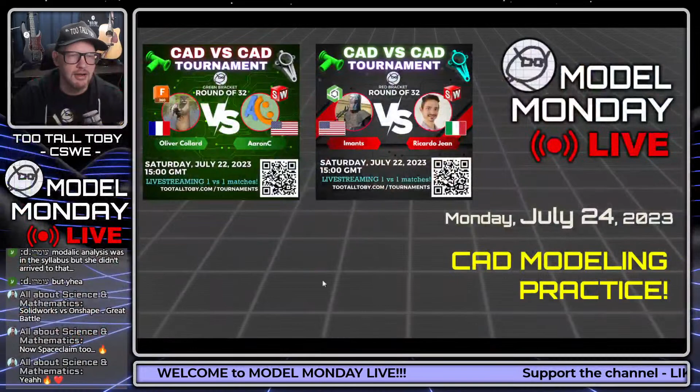Like I said, over the weekend we did some really cool matchups. We had Oliver versus Aaron C., Fusion 360 versus SolidWorks, a really nice matchup. I'm going to show you guys how to model some of the challenges they did this weekend, live, using Onshape. We also had Onshape - Imants from Onshape - going up against Ricardo Jean using SolidWorks, and that was really, really neck and neck. I wish I could have had 5 more matches for them to go against each other, because they were so closely matched, and those are always the most exciting matches.

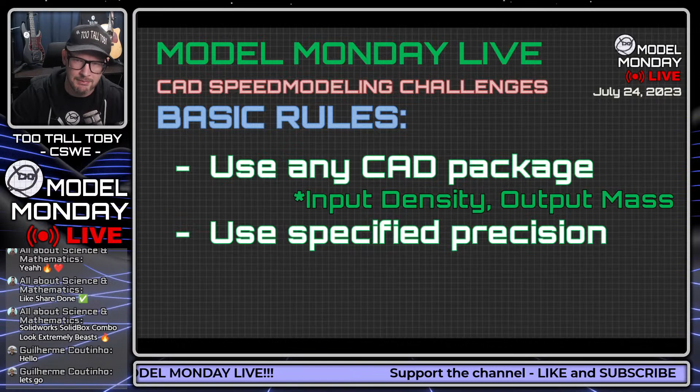So I'm going to show you guys the 2D print. You're going to try to calculate the mass and enter that mass in the YouTube chat. We're going to find out who is the fastest speed modeler in the chat. The basic rules are you can use any CAD package as long as you can input density and output mass, and you want to make sure you use the specified precision on these challenges, otherwise you're probably going to be out of spec. The first person to answer correct in the chat will be declared the winner.

I'll talk about that a little bit more in the live presentation. But the point I'm making here is if you're using a different CAD package, make sure that you've got the correct material density. Otherwise, you're not going to come up with the correct answer.

The advanced rules are that this is meant to be fun and good-spirited. This is something that occasionally I will make mistakes. I do spend a lot of time auditing these drawings. One of the things I'm very proud of as far as the collection of drawings I've accumulated is that they all have everything you need to create a 3D model. A lot of times if you get a drawing from university or just a random drawing from the internet, it's missing dimensions, and you can't actually make the thing on the print without assuming or just guessing what that missing dimension is. So it's nice to know that I have a collection of these drawings.

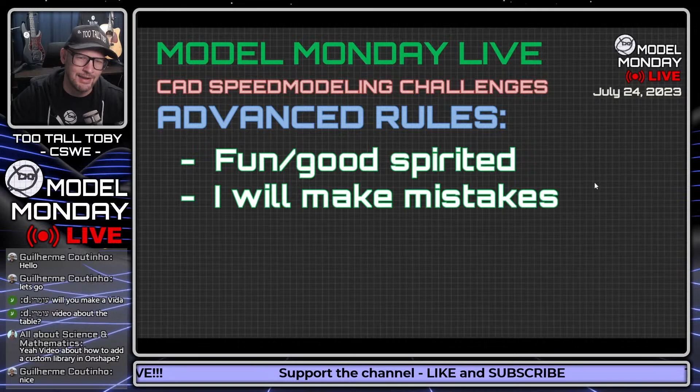Question coming in here: can you make a video on how to add a custom library in Onshape? Not only can I make a video on how to do that, but I already did. It's on the Onshape YouTube channel, there's a playlist on there. I will point to that once we get this first challenge going for the chat. Great question, thank you Omri and All About Science. And don't worry, I got you taken care of, it's already out there for you. You can even search my library in the public space and just pull my library down so you don't even have to recreate it.

Finally, the Ivan exploit is permitted. We saw someone in the tournament this weekend start to use the Ivan exploit and then decide to do a little flex and actually make the model legitimately. That was pretty tight. Shout out to Imants for going the extra mile there, almost costing himself the point, but actually not using the Ivan exploit. That was pretty cool.

All right guys, here we go, let's get into this first challenge. Like I said, the challenges today are a little bit on the complicated side. I think it's going to take you the full 20 minutes.

My goal is going to be to show you the second challenge in about 20 minutes. So let's get into this first challenge here.

Your job is going to be to take a screen capture of this and turn it into a 3D model, calculate the mass, and enter that mass in the YouTube chat. First one to get it correct in the chat is the winner and earns the point for today.

Here we go, 3, 2, 1, go! What is the mass of this part in grams? The tolerance is plus or minus 1 gram, and the material is listed in the title block: 1060 aluminum alloy, density of 2,700 kilograms per cubic meter, and this part is called wedge bracket.

This part has some pretty cool geometry in the drawing for you to examine and figure out. In the lower left corner, that radius 126 and the linear dimension 126 are really just meant to reinforce that the center point of that radius is collinear with the bottom of the base. The radius is the same as that linear length because the center point isn't hanging out in space somewhere.

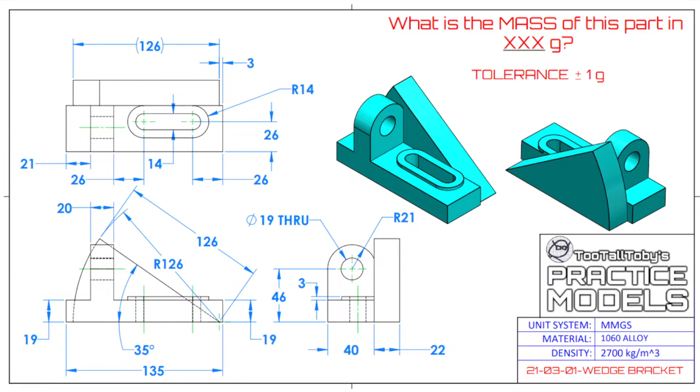All right, good, so hopefully that was enough time for everybody. Again, your job there was to grab a screen capture of that and make sure that you have that on your screen - a lot of times I'll put that on my second monitor.

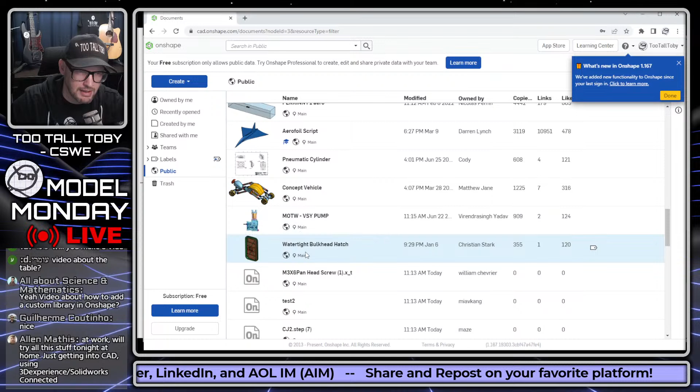So if you're interested, let's see if we can find something a user made, like this concept vehicle by Matthew Jane. You can just click on that, and it opens up in your session of Onshape. Look how quickly that opened. You're able to examine this thing as an assembly, and you're able to move components around.

You're able to see actual dynamic assembly motion based on the mates in that assembly, and you're able to make a copy into your workspace so you can start making your own version of this thing. Now, obviously, you can't change Matthew Jane's documents, because you don't have permission to make changes to his project. That would be a crazy system if everybody could just change everybody else's files. But you can certainly make a copy and make changes to your own, and kind of springboard off of this design.

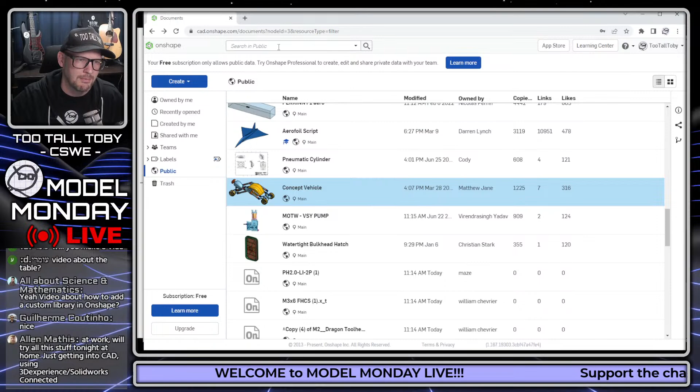Or maybe search for an item that you need for your product - search for a wheel in the public space, or a knob, or a guitar, something like that right in the public space. So pretty good stuff here. Definitely really enjoying my time in Onshape, as I've mentioned in previous episodes of Model Monday Live.

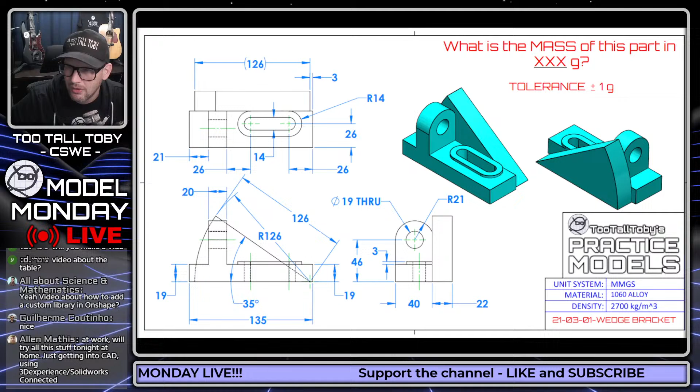Allen's in the chat: 'At work, we'll try all this stuff tonight. Just getting into CAD using 3D Experience SolidWorks Connected.' Okay, another solution that's out there. So good to know that we've got people using all different solutions out there. And you're in this wonderful world of TooTallToby Model Monday Live. All CAD is welcome. Good luck on your journey, Allen.

Erwick, what's up my man? Thanks for joining us. So yeah, the tournament this weekend was, like I said before, totally epic.

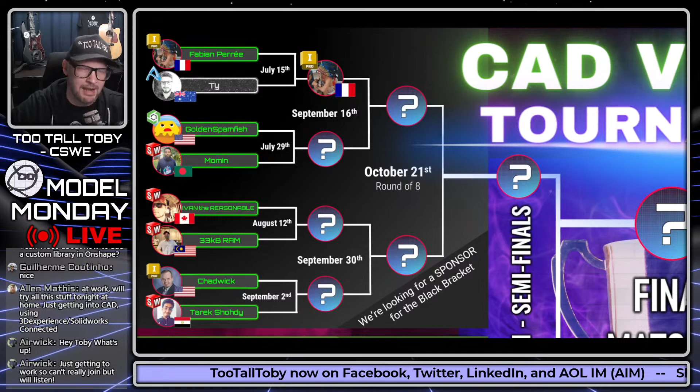Two weeks ago on Saturday we had the July 15th matchup between Fabian and Ty, where Fabian came out victorious. Then this past weekend we saw Imans versus Ricardo Jean. I don't know if this was the closest match we've had so far, because the match in the black bracket with Fabian and Ty was also very, very close - the answers were coming in within just a second of one another.

But it was kind of a surprise in this match with Imans and Ricardo, because Ricardo's screen didn't share properly on Zoom, but he was still modeling. So when we saw Imans go through and create the model, and then saw Ricardo submit his answer a second later, it was just such a cool moment. It was a real surprise.

Then they got to model against each other in the second one, and we all got to watch their modeling technique. I'm going to do one of those models today so you guys can see how I would approach it. What's up, Edgar CHL? Welcome, thanks for joining us.

And Oliver versus Aaron was also an awesome matchup. It was really cool to see Fusion 360 - this is the first time we saw Fusion 360, first time we saw SolidWorks, and first time we saw Onshape in the tournament this year. It's always fun to see the way the different CAD packages operate, watching them stream live and think through the challenge, but also seeing the different features and user interface.

A lot of these CAD packages I've never had the chance to run, or even see. So in the tournament it's kind of cool that we get to see them actually functioning - how would you do this in SolidWorks? How would you do it in Fusion 360? Kind of seeing two masters showing us how to create these different features.

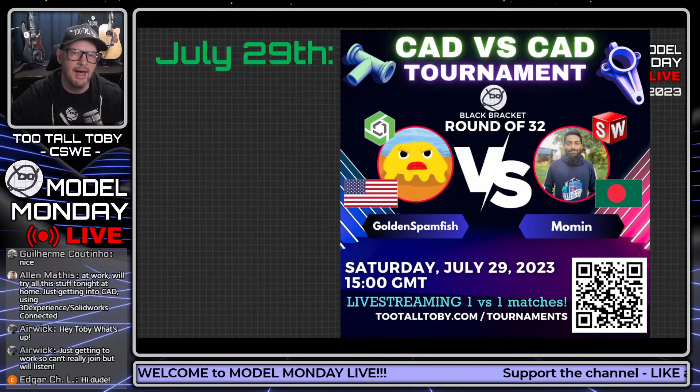So excellent matches this weekend, huge thank you to all of the runners. Be sure to join us July 29th - we're going to see Onshape versus SolidWorks, Golden Spamfish going up against Momin. Check that out on Saturday, July 29th - we're going to see some really good matchups there.

Also on July 29th in the blue bracket, we've got old friend of the show, Muhammad, using CATIA V5. I think this is his third year in the tournament using CATIA. Muhammad always shows up and gives us a great demonstration of what it looks like when a pro uses CATIA. It's another one of those CAD packages a lot of us haven't had the chance to run, so it's really cool to see it in action.

We see here that Muhammad is going to be going up against Res, who is going to be using SolidWorks, also from the United States. That's going to be a great matchup as well.

We got AMD Alex in the chat. What's up, Alex? Already coming in with an answer, very impressive. I'm not going to say if that answer is correct or incorrect, but Alex is going to be in the tournament a little bit later on.

It's great practice here in Model Monday Live. I can't think of a better place to get your practice in, get your nerves out, and see what it's like to actually compete against other people. You're competing against everybody from around the world, but you still have that privacy bubble around you where it's just you on your screen. You're not sharing your screen yet, but this is a great chance for Alex to get some practice in before his big match comes up. For anybody out there who's in the tournament, it's a nice proving ground before it actually comes to tournament season—or should I say tournament time, since we're already in the season.

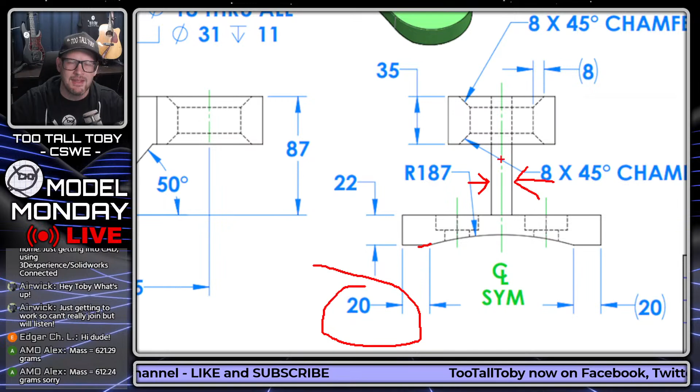He got to the end of the run, finished the model, and submitted his answer. I said, I'm sorry Aaron, you've submitted an incorrect answer, so you have one more chance to submit a correct one. Aaron started going through and found one of his mistakes, but not the other. When he found that first mistake he said to himself, 'that's probably what it was,' and submitted the answer again. But it was like, oh, I'm sorry Aaron, that's once again an incorrect answer.

So we put the clock up and gave his opponent, Oliver, 5 minutes to solve this thing. Oliver wasn't able to solve it in 5 minutes either, so it ended up being a push.

It was one of those situations that I think are really interesting in the tournament. Sometimes if you make one mistake and you go back through and find it, you're good—you can submit that correct answer. But if you make two mistakes, it's really easy to find the first one and think 'oh, that must have been it.' In this case, it turned out he didn't quite find the correct answer.

So, lessons learned from watching people in the tournament—a good lesson for anybody in the tournament in the future. It's a tricky balance trying to get that answer in before your opponent, because you never know. You can sort of see your opponent's screen on a delay, but you never know when they're going to do 2 or 3 quick moves and then they're done, submitting the answer before you. But you've got to balance that against really going through and checking your answers.

All right, so good to see some action here in the chat. We see some more answers coming in. Of course, in Model Monday Live, you can revise your answer as many times as you want.

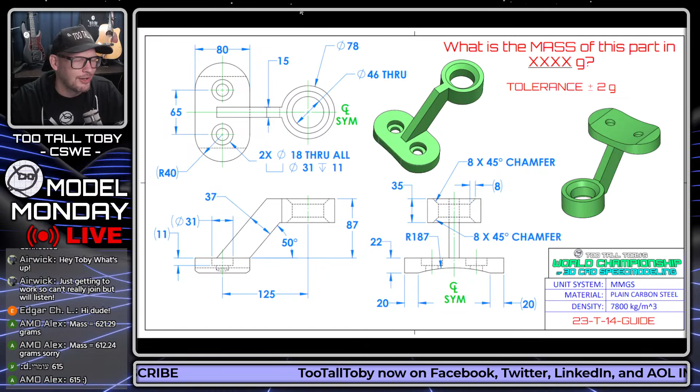We see that Alex and Omri are going at it here, neck and neck, coming up with some different answers. So we'll see what everybody else in the chat comes up with.

But I've got about 9 minutes to finish this model. What I like to talk about during Model Monday Live is what a professional would think if presented with this model, whether it's a 2D print on the shop floor, a napkin sketch someone hands you, or just an idea. Maybe I just have an idea: I need to create a mount for a soldering iron.

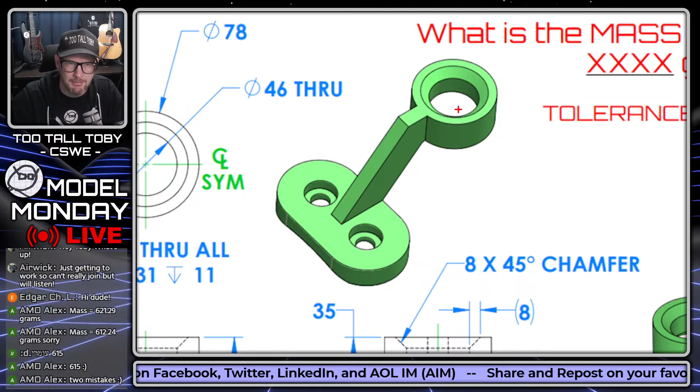This looks like it would be a mount for a soldering iron. The soldering iron is going to go down in here, sitting in this hole. It usually has some kind of a sleeve, and the soldering iron needs to sit in there. So I'm going to create a little mount that I attach to the side of my workbench so I can set my soldering iron down easily while I'm working, without having to completely cool it down. I don't know if that's really what this thing is, I'm just saying maybe that's what it is.

You have that idea, so now you've got to model it up. The first thing I always ask myself is: is the model symmetric? Can you draw a line down the middle and it's the same on both sides? Because if it's symmetric, that helps you figure out where to create the origin, what your starting sketch will look like, and what your very first feature will look like.

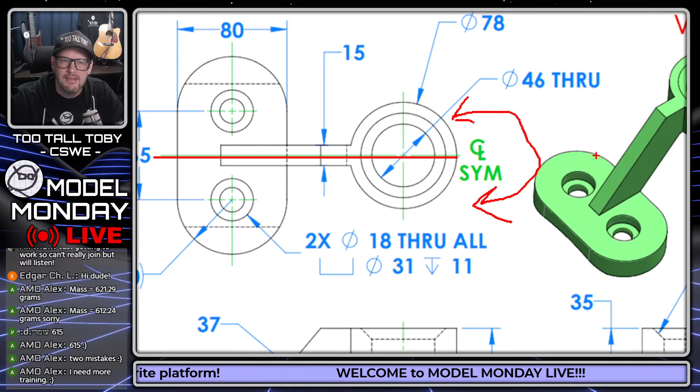In this case, the model is symmetric. Whenever we see the CLSYM symbol in green here, that means the model is symmetric. So now I know the origin is going to be somewhere in the middle.

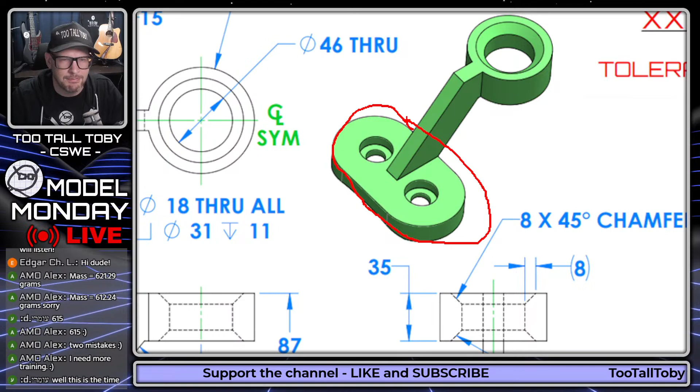Now the next challenge is what's going to be your starting feature in this model. I think it makes sense to have either this section up here or this section down here be your starting feature, because all the dimensions are coming from those two features. It gets a little arbitrary which one you decide on, but most of the time in the engineering world we pick this feature because it represents the base, or the thing that's going to be mounted to the other thing. It kind of represents an anchor point in the real world, and that's usually an intuitive place to start your design in the 3D CAD world.

So that's where I'm going to start. I'm going to take a screen capture of this thing. My game plan will probably be to create this shape here, create the little curved area on the bottom of that shape, create this shape up here, create the bridge that goes between them, and then finish by creating the holes down here in the base, the hole up here in the top, and the chamfer going around here.

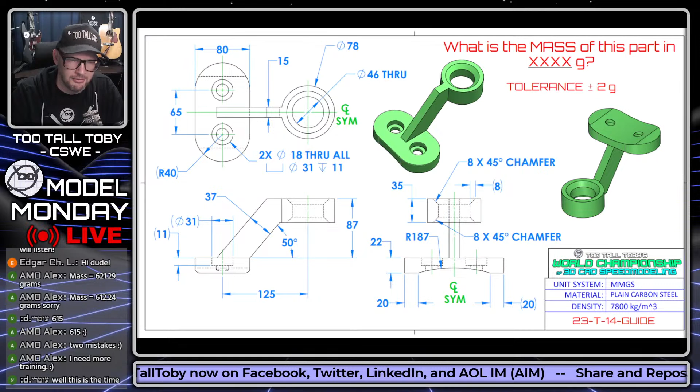How do I know that's the order? The simple answer is I just know from experience, from having built models like this over and over again, and a lot of experience in the world of 3D CAD. So how do you get good at anything? You just got to practice, practice, practice.

So I'm going to create a new document here in Onshape. I'll call this one 23-T-14-guide. This means if you want to see this model in 3D, you could sign up for a totally free account at onshape.com/free, search for this text string in the public documents, open up this model, and take a look at how I created it.

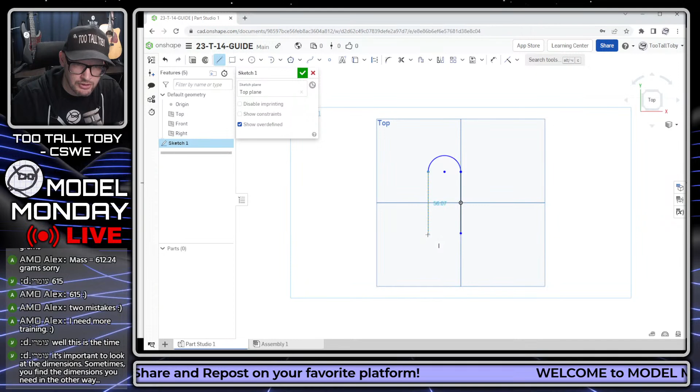I'm going to start by creating a sketch on the top plane. You would probably create the origin either at the center of this shape, or at the midpoint of one of the edges. This gets a little more nuanced and honestly a little less significant—it becomes kind of arbitrary which decision you go with. I think I'll pick the origin itself and this line, and add a midpoint relationship between them. Once I've got that midpoint relationship, I'm pretty much ready to fully define this sketch.

So it looks like this is going to be 65, really from center to center, and then this is going to have a radius of 40, or a spacing of 80. Now I'm ready to turn that into an extrusion.

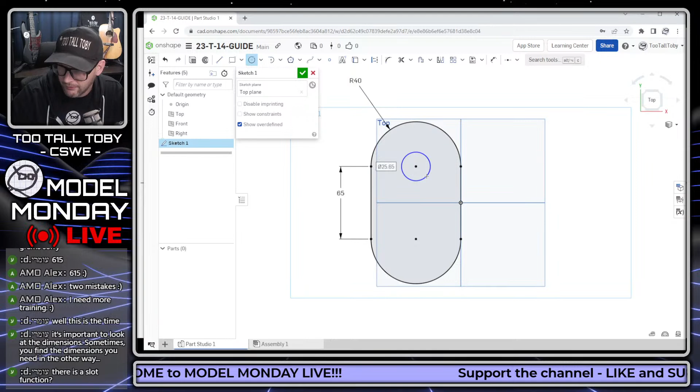What I could do is get in there and start drawing the geometry for those holes as well. Onshape does a great job in this scenario of letting you create all the geometry you need. I could create these holes here, and certainly I could mirror them, but a lot of times if you learn how to use auto dimensioning, it's just as fast as mirroring.

Now, this is really a speed modeling technique more so than a real world approach. In the real world, you'd want to either do that with a hole creation tool, or you'd want to do it with at least a mirror.

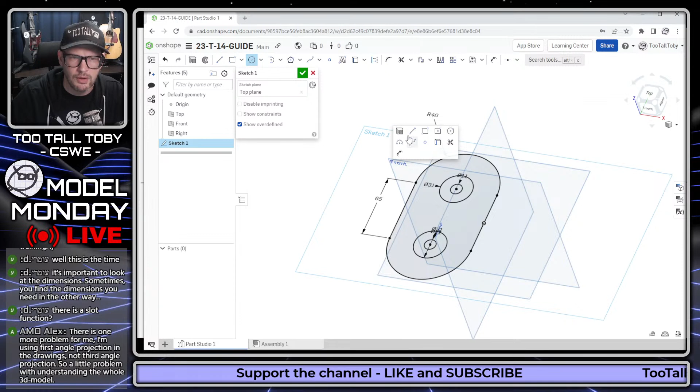But you can see here that, like I said before, Onshape does a great job of grabbing all the geometry that you need for that particular shape.

So this is going to come down to a depth of 22 millimeters, and I'm going to reverse the direction. I do see some chat coming in, but I'm trying to finish this pretty quickly here.

So now that I've got that geometry in place, I'm going to select this face, begin a sketch, get normal to. I'm going to take this bottom edge here and convert it.

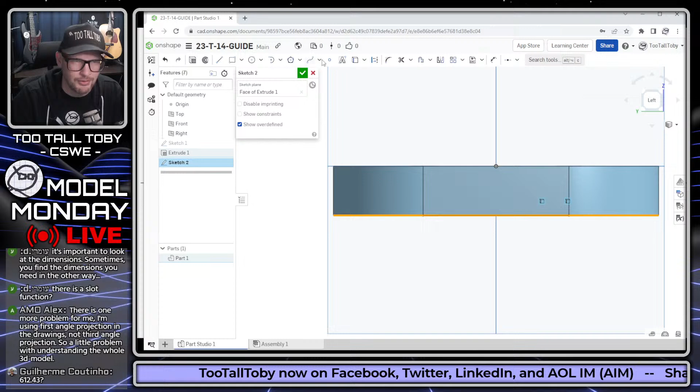I know this drives people like Airwick nuts when I go through and convert stuff, because I could just use imprinting, but sometimes it just makes it a little easier for me to utilize that geometry. You don't really have to, you could just imprint, but it just makes it a little easier. I'm kind of a creature of old habits sometimes.

So make that 187 for the radius. And then this is the spot where Aaron misdimensioned. He made this dimension 22 instead of making it 20. There is a 22 dimension right there on the print, which is probably what led to the confusion. Sometimes my prints do have intentionally tricky features.

So I'm going to say this is going to be a remove and a through all, and that should cut out that bottom section. Yes, very nicely.

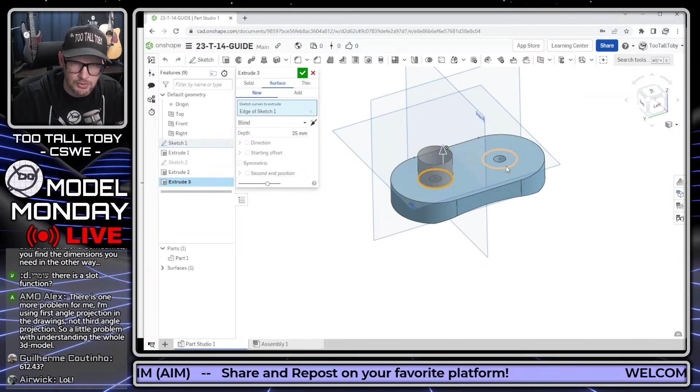I could also, at this point, if I wanted to, go back and show this sketch and then just reuse it to also do a remove using these features. Onshape makes it really easy for you to quickly remove geometry using the same sketch.

Whoops, I didn't mean to get the whole thing there. There we go, and that's going to go down to a depth of 11. All right, so now we've got our counter bores in there. We don't need to see that sketch anymore. There's kind of our base feature on this thing.

Now what I'm going to do is take this top plane and jump into the new plane creation command, and I'm going to say that's going to be offset to a distance of 87.

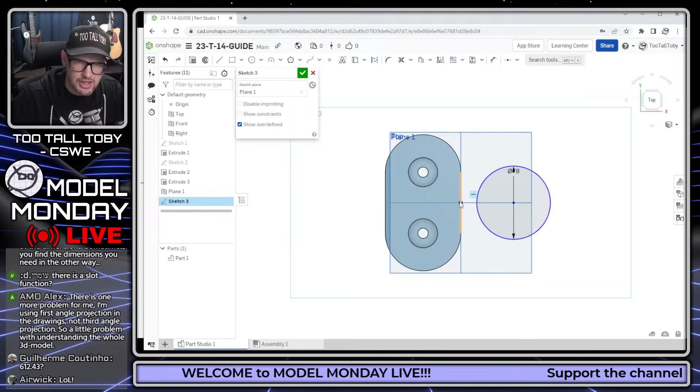And now on this new plane that I just created, I'm going to create the geometry for that upper region. So I'm doing this as two different bodies or two different regions of the model. In Onshape, we would consider that two different parts, but in other CAD packages, you might consider it two different bodies. The thing that's cool about Onshape is that there's really not that much difference between multi-body design and multi-part design in a single model. It all kind of sets itself up to be added to an assembly later on.

So now that I've got that geometry in place, I'm going to go front plane, begin a sketch, orient my view, and I'm going to, once again, make the Onshape community angry by using a convert entities command that I probably don't need to use. So I will convert these edges here.

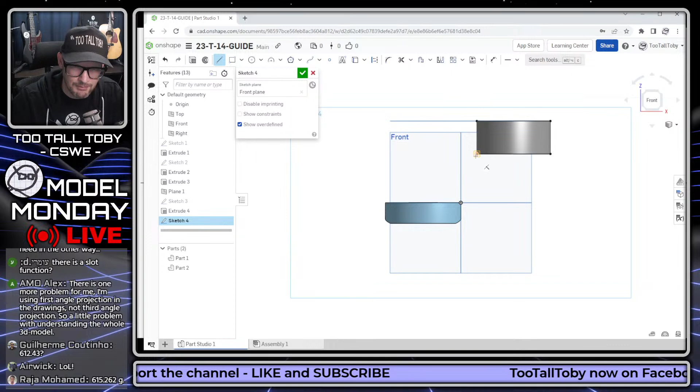And that way I'm setting myself up nicely for this geometry to come off here and then come down at an angle, comes right down to that point, come over, come up, comes up to kind of a flat spot here, and then come over to this point. We'll make that guy horizontal.

We'll make these two parallel, and we will add a dimensional relationship between those two. That's going to have a dimension of 37.

Oh, you know what? I never defined the location of that upper region. I'm saying to myself, why does the upper region look so close? And the reason is because it's close. So that's going to be 125 from the center point here.

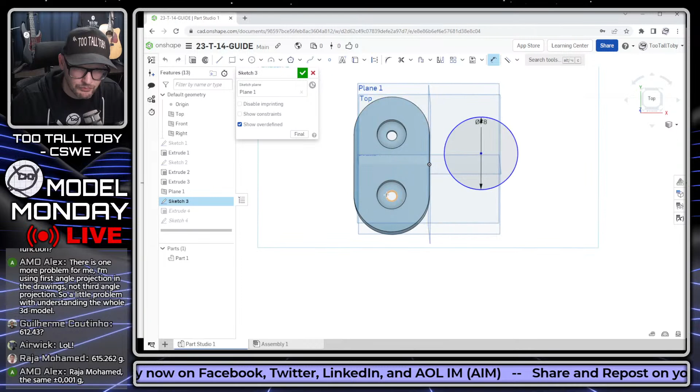So let's grab that center point. Let's grab that point there. That's what we like to see. Nice, fully defined sketches. You got to fully define every time, like somebody once said in a song.

And this guy is going to have an angle dimension here of 50. Nice, fully defined sketch there.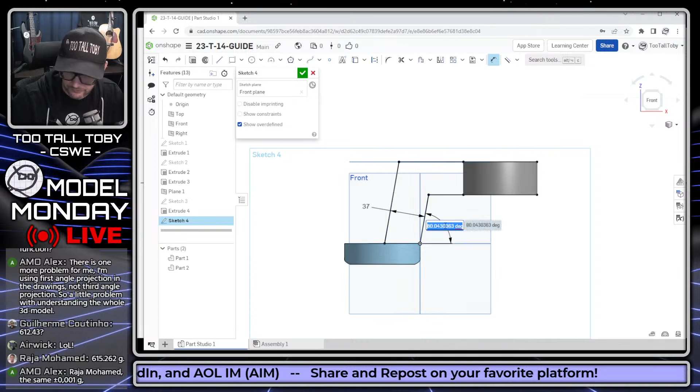And then all I really need to do is just close this thing off. I'll just close it off at the midpoint here. And I don't need to do any trimming or anything in Onshape. It kind of just knows what you want. It's kind of cool, look at that. It just immediately knows that we want to grab the geometry that normally would need to be trimmed.

So we're going to say that this is going to go out to a depth of 15, and that is going to be a symmetric or mid-plane extrusion. And then for our merge scope, we're going to merge it with both of these existing bodies.

Boom, looking good. Begin a new sketch on that top surface there. Let's jump into a circle command, and we'll make a circle here with a diameter of 46. And that's going to be a through all remove.

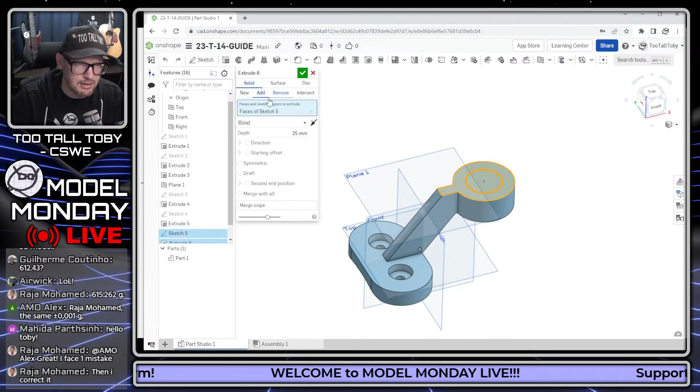And then we can finish up here with a chamfer, and that chamfer is going to have a distance of 8 by 45. And we'll say it's going to be here, just picking that face, got both the top and the bottom.

And then we do what's called the final spin, where we revolve the model around or rotate it around. We look at the model. We say, does that have everything that we think we should have? I think it does. Let's go into our assign material option here.

Let's look at the title block and assign that the material of plain carbon steel. And let's go into mass properties and see if we got it right. So the answer that I'm coming up with here is a mass of 2,500 grams. That's not right.

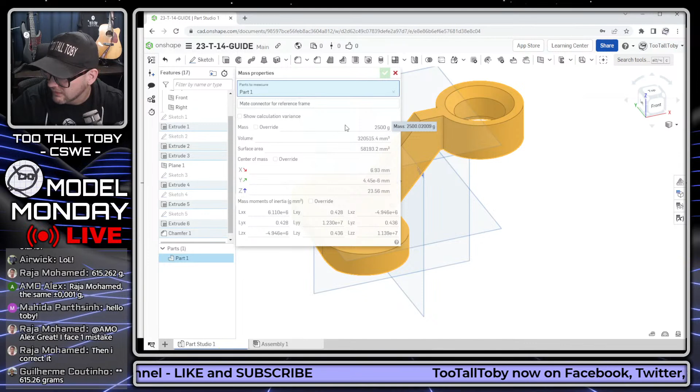One second here, guys. I don't think that's right. This is T14... 2484 is what it's supposed to be. Why am I coming up at 2500? Uh-oh, we got another bit of drama on this thing. So let's see here.

Still at session 4, Model Mania. Nice. All right, let's see here.

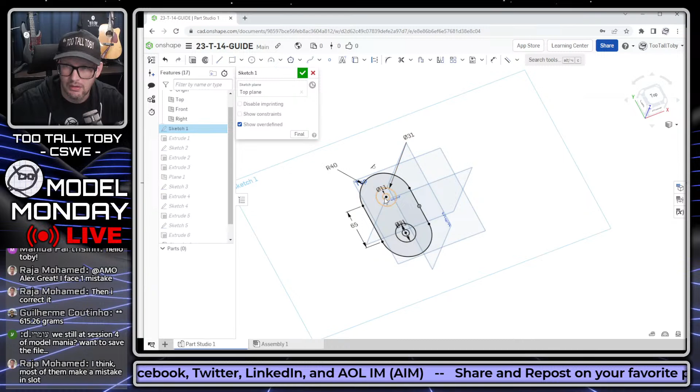Okay, nice. I'm looking at the discussion in the chat, just seeing if anybody in there is helping me out.

I'll tell you what, guys, like I said, the second model that I've got for you today is pretty complicated, so I'm going to put this on pause for a second. I will come back and resolve this. We'll figure out where the discrepancy is, because I'm sure I made a mistake along the way. But let me go back here to the challenge that I have for you guys today, and we will come back and look at that. That answer should be 2484 grams. So me coming up with 2,500 is not correct, and I'm going to have to go back through and take a look and see what exactly happened.

But like I said, today I want to make sure that we have enough time to get through these challenges. So let's take a look at our first challenge here for what is the mass of this part, our first challenge for the chat.

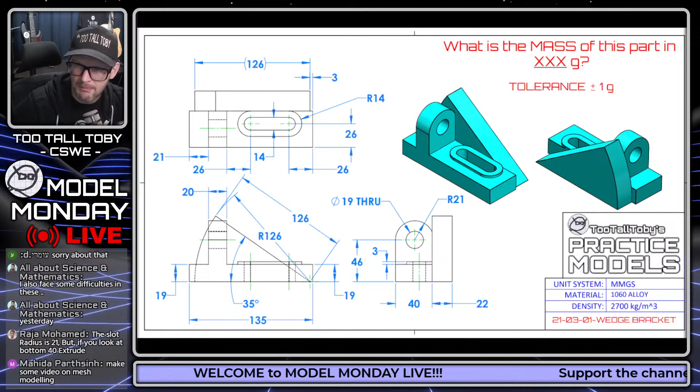And we saw that the first answer came in here from AMO Alex with a mass of 621. AMO Alex revised to 612.24. And then Omri came in here with an answer of 615. Hold on, let me show you guys what I'm looking at here. So we see that Alex came in here with 621. Alex revised to 612. Omri came in with 615. Alex came in with 615.

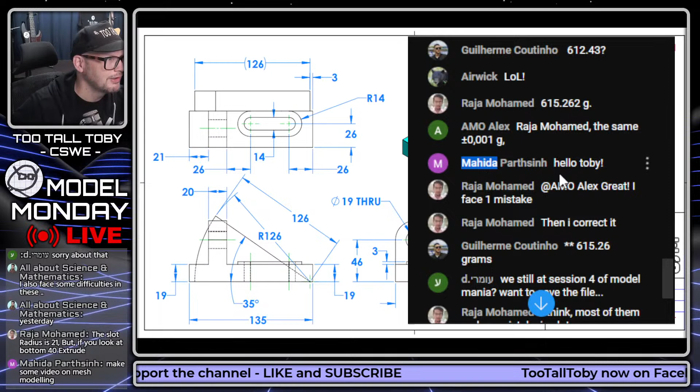Who else answered this one today in the chat? We got, I said Guilherme earlier, Guilherme coming in here with 612. We got Raja coming in with 615. We got Mahida here today. What's up? Hello, how are you? Nice to see you in here today. We got, let's see here, Guilherme revising to 615. And I think that's it for the answers.

Let's take a look here and see what the correct answer is. The correct answer is 615 plus or minus 1 gram.

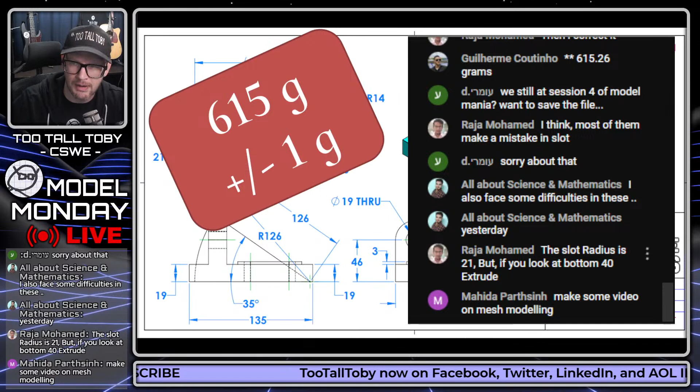Very nice, and congratulations to everybody who took this challenge, and congratulations to everybody who got it correct. It looks like the point is going to go to Omri, coming in with 615, the first person to come in with that answer. Very nicely done to Omri.

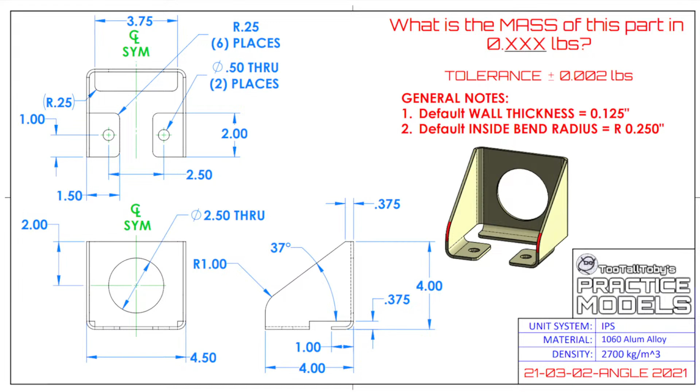Let me turn off the chat here in the overlay. And let's just take a look here and see if we can't figure out what's going on with this thing.

At this point, what I would do is roll back to the beginning of the tree, and I would one by one look at the different features and try to figure out where I went wrong on this thing. I'm only off by a few grams. I don't know that, though. I just know that I got the wrong answer. So, in the tournament, I don't know.

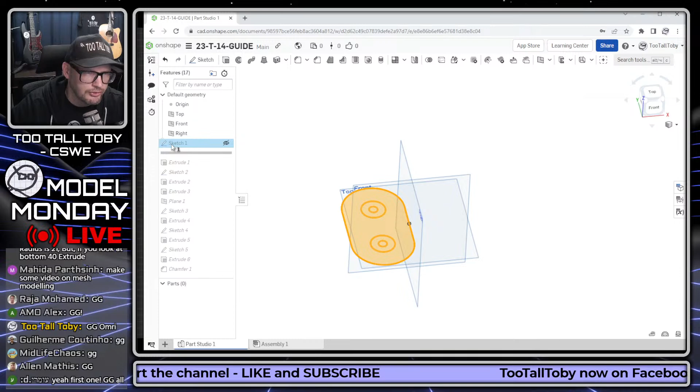So let's go back. A lot of times what I'll do at this point is roll the bar back to the beginning of the tree, and that way I can really remember and understand how I built this thing. So we'll start with this first sketch here. In Onshape, you can double click on the sketches to get into edit sketch mode.

And I've got a diameter here of... okay, here's the error. Wow, I found it on the very first feature. This is supposed to be 30, this is supposed to be... so this is how you read a hole callout. 18 millimeters is the diameter through, so that's this right here. 31 is the diameter of the counter bore, so this symbol here means counter bore, so 31 is this diameter here.

A lot of times on my prints, I'll give you guys little hints, little reminders, like down here. I say, hey, just remember, this is 31 because that's the counter bore. And then 11 is the depth. Well, look what I did. I made 11 the diameter of the through hole. So here it is, 11. That's supposed to be 18.

That was pretty fast troubleshooting. The very first feature we looked at had the problem. All right, so now that's 18. So now let's exit that sketch.

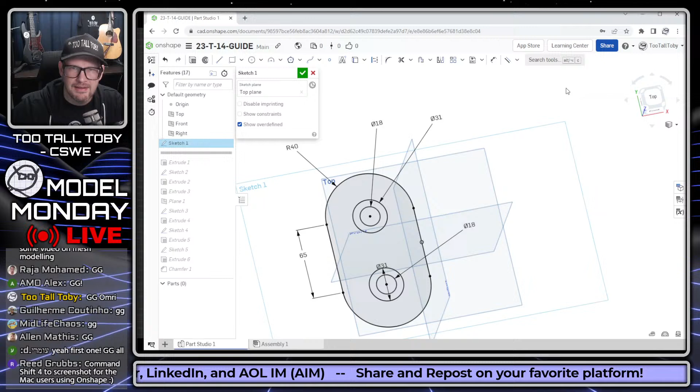Let's roll this thing to the end, and let's once again take a look at the mass properties. And the mass properties of this are... boom, 2484. And that is correct. Good job, TooTallToby.

Oh yeah, nice, Reed in the chat giving some pro tips out here to Mac users. Command-Shift-4 for screenshot for Mac users. Very nice, good one to know about. Print screen for Windows users still works to just capture the whole screen, although I think you get all 3 monitors, or however many monitors you have. I'm not trying to flex, but if you're a 3-monitor user.

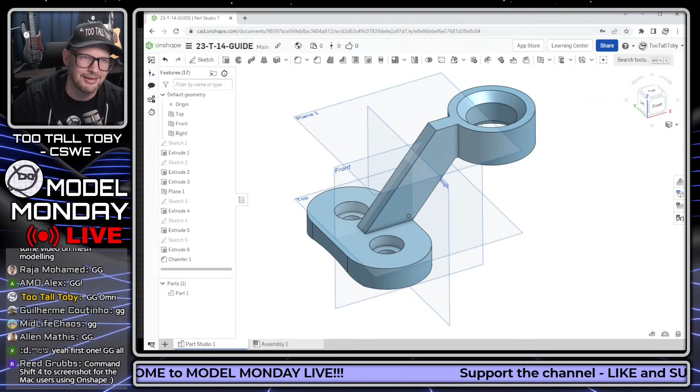All right, good deal, so we got that one correct, and that is how you go through and model that challenge in Onshape. Like I said, we saw this one between the Fusion 360 user and the SolidWorks user during the tournament, and unfortunately neither of them got the correct answer, but it is not an easy model. Some of these models are a little more difficult, some are a little easier, and it's all up to the wheel of fate to decide who gets which models.

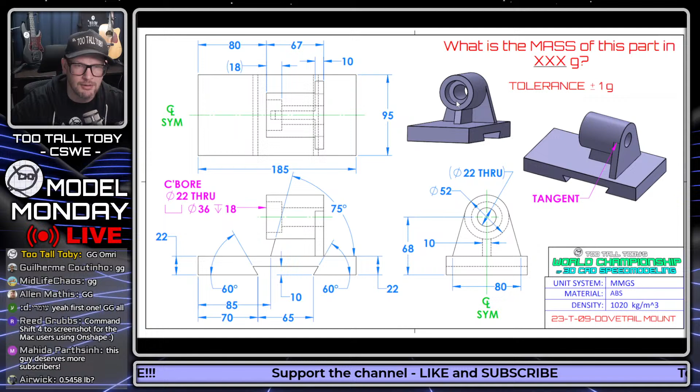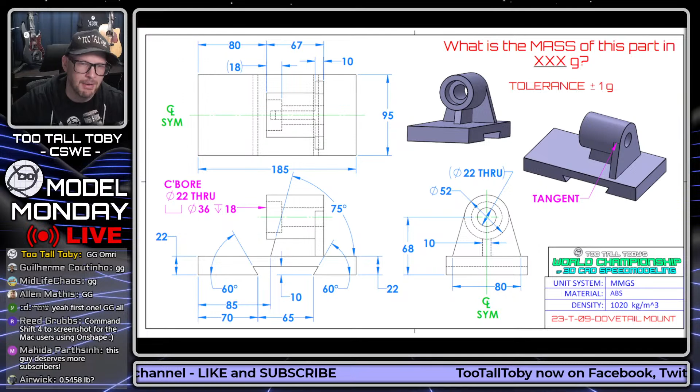So then during the tournament this weekend, when we moved into the red bracket from the green bracket, we saw our first showing of Onshape versus SolidWorks. We saw this model that Imant modeled up in SolidWorks, but unfortunately Ricardo's screen locked up - there was a technical issue, not on his end, just between him and me. The broadcast he was using didn't come through, but he was still in there modeling this thing, and their answers came in within a second of one another. Super, super close match here. It was Imant who got it correct first using SolidWorks, but I wish I could have seen what Ricardo was doing in the background.

But then we moved on to the next match, and they were challenged to build this part. This part was pretty cool. It gave them both a little bit of a struggle, a little bit of a fit. I think the thing that made this part challenging was the section view up here in the corner.

When we look at this section view here, you can see it's got all the information you need. The instinct a lot of CAD users have is to create the center line here, then create this geometry from the section view, and just jump into the revolve command.

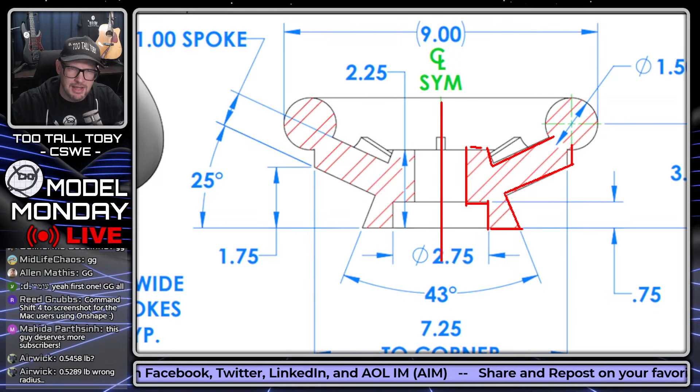Most of the time that is probably good instinct, but before you look at the views and just jump in and start creating the geometry, you really have to look at what the model itself is representing and ask yourself, what's the best way to create a model like this?

What I usually do as an experienced CAD user is break the model down into different sections, and I name those sections in my brain. You name them some kind of name that's going to make sense to you logically, a functional name. I don't necessarily know what this thing is or what it's doing, so it might not be the correct engineering term, but in my brain, I give it a name.

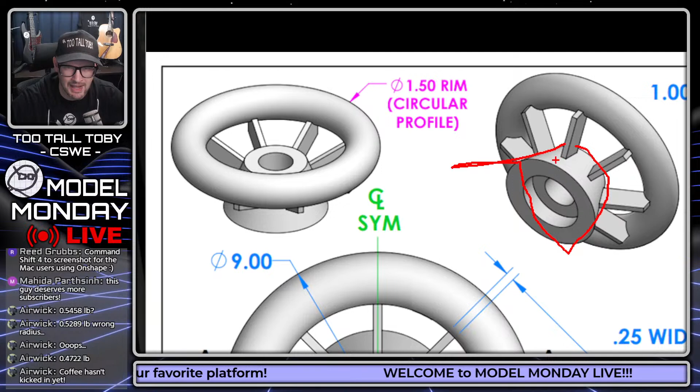For example, this section here is like a tapered section. It looks almost like a red Solo cup turned upside down. This section here, I would probably call something like the hub. That's the middle of the model.

And this section here that's going around the outside of the model, I would probably call that something like the rim. Again, this is just in my head, as I'm imagining the model. And finally, this section here, we would call that the spoke, like a bicycle wheel has a spoke on it.

So if you take the model and break it down into those three sections, it starts to become questionable if you should be taking this strategy as your first sketch. I would think it would make more sense to make your first sketch maybe look something like this, where you're just creating that shape and you're going to revolve it.

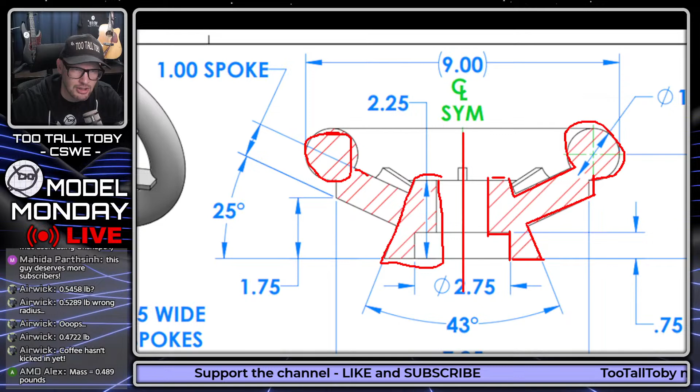Then maybe your second sketch looks something like this, where you're creating that shape and going to revolve it. Then your final sketch, your third sketch, looks like the spoke, the extrusion for the spoke. You'd take that extrusion and create a pattern of it. Then maybe finish by creating the counterbore going through the center of this thing. There's a lot of different ways you can do this.

But I think you just want to remember, sometimes it really pays off to just take those extra few seconds to look at the model and come up with a game plan.

And that's not only in a speed modeling competition, but also in the real world. In the real world, a lot of times it's good to take a minute and think to yourself, okay, how am I going to build this thing? Are there going to be dependencies? Is this thing going to change in the future, so I'm going to have to go back and make changes?

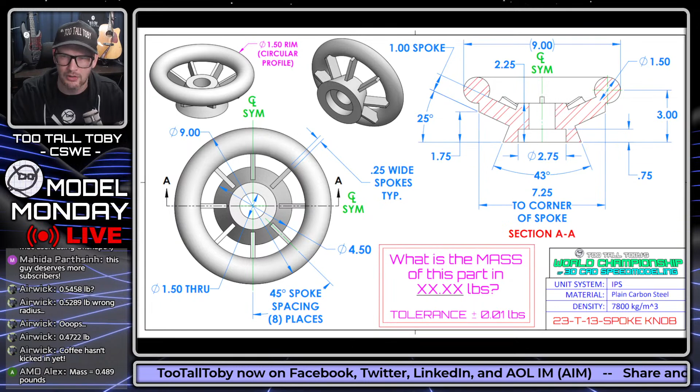By asking yourself those questions and using the answers to come up with your game plan, a lot of times you can really save yourself a lot of time. So I'm going to take a screen capture of this and move it over to my second monitor.

Airwick says, I would just do it all in one shape, one revolve for the first two bodies, and then extrude the spoke separately. Yeah, that's what I think our runners were trying to do. I think that was kind of what was in their mind at first, but things got a little hairy when it came to doing the revolve and choosing the correct profiles, because if you're going to do it that way, you have to remember to include this break here, and this break here.

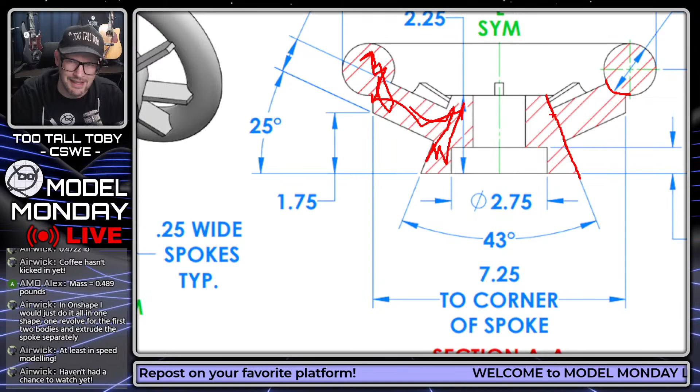Otherwise, Onshape is going to want to, it's not going to know that there's a break there, and so it's going to want to revolve this whole thing, and you're going to be left with that extra geometry. Then what are you going to do? You're going to try and do a cut extrude from the top down. That's actually the situation Ricardo found himself in, and it was really interesting to watch him thinking through that challenge. So you make a good point. You just need to remember to include that break, and sometimes if you don't see that break right there in the section view, it's easy to overlook.

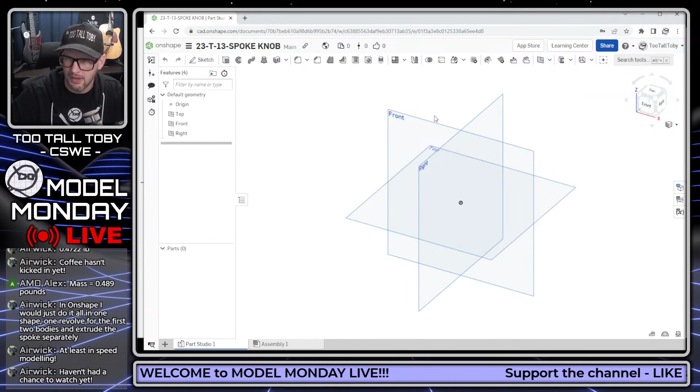So let's see if we can follow that game plan and create this model. I'm going to do create document. I'm going to call this one 23-T-13. That way, if you want to examine this model yourself, just get a free account for Onshape at onshape.com/free. Or if you already have a free account, or if you're on a paid plan on Onshape, you can just search the public space and find this document.

I'm going to go into my settings and change my workspace units. Let's make this one inch, and let's make this pounds so we can get the correct mass in the correct units. Then I'm going to go to the front plane, begin a sketch, orient my view, and create that first shape. I like to keep my sketches nice and simple. Keep your sketches simple, that's what I'm all about. So the height of this hub region here is 2.25.

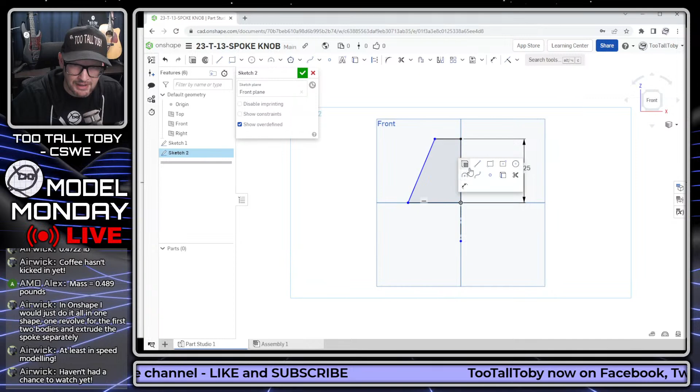The diameter here, certainly I could create a center line. So create a center line here like so. That way I can actually get the double dimension, or I could type in the dimension and then just type a slash 2. Both techniques are totally valid. This is going to have a diameter of 4.5, and this is going to have an angle here of 43 divided by 2, because it's 43 across the whole thing. We'll jump into a revolve feature here. We'll say that we're going to revolve about this axis, and that gives us our first feature. Nice, simple sketches, that's what I like.

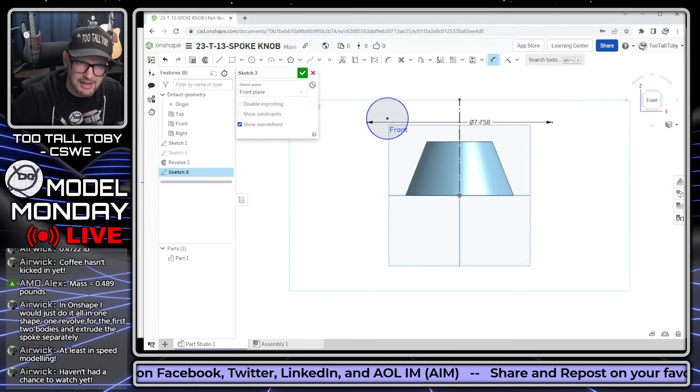Front plane, I'm going to begin a sketch again. I'm going to create a circle, and once again create a center line. So I begin dragging this line, I tap Q on my keyboard, that jumps me into the center line command. I'm going to say that this has an overall diameter here of 9 inches, and that the circle has a diameter here of 1.5 inches. And that the height to the center of that rim - remember, I'm not naming it necessarily anywhere, I'm just naming it in my brain, just using my brain to keep track of things. So there we go, there is the rim.

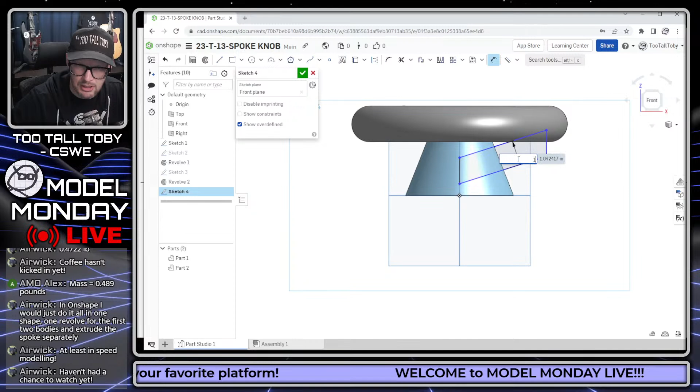Now I'm going to finish this off by once again going to the front plane, beginning a sketch, and creating a sketch for the spoke. I think I can probably get away with creating the spoke in a way that it's directly embedded in the hub, and it's right in the center of the hub. I think that's going to be okay for this example. So it looks like the spoke has a 1-inch dimension here between these two parallel lines, an angle of 25 degrees here, and a distance to this corner of 7.25 divided by 2, because I don't have the center line this time. And it's got a distance to this corner of 1.75. So there is our spoke. Let's do an extrusion there, let's make that extrusion symmetric, and we'll say that extrusion has a width of 0.25. And there we go, there is our spoke.

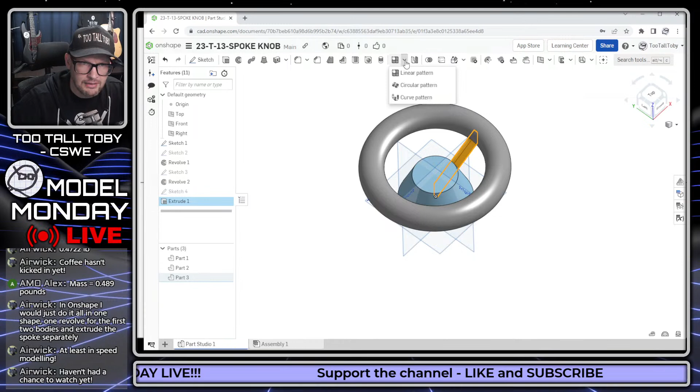And we're going to say that that spoke is going to be patterned. So we're going to jump in here to the pattern command. We'll do this as a circular pattern, and that is going to be patterned using this part, the spoke part. We'll pattern here around this axis, and that's going to be 8 instances of that spoke. Then we're going to take all those different bodies and just merge them together. So we'll do a right mouse button here, Boolean, and we'll do a union.

And that way we merge everything together. And now we just need to finish off by adding a hole here. We could do this using the hole feature. There's a counterbore option for that hole feature.

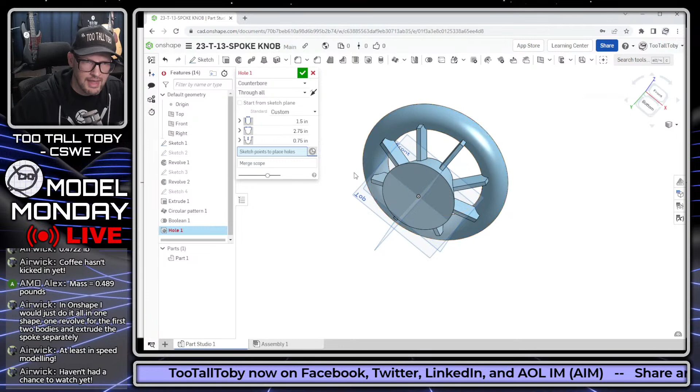That counterbore option is going to have a through dimension of 1.5, counterbore dimension of 2.75, and counterbore depth of 0.75. And then if you use this option here for select mate connectors, that allows you to just pick the center of this face, nice and easy. Boom, there is your counterbore.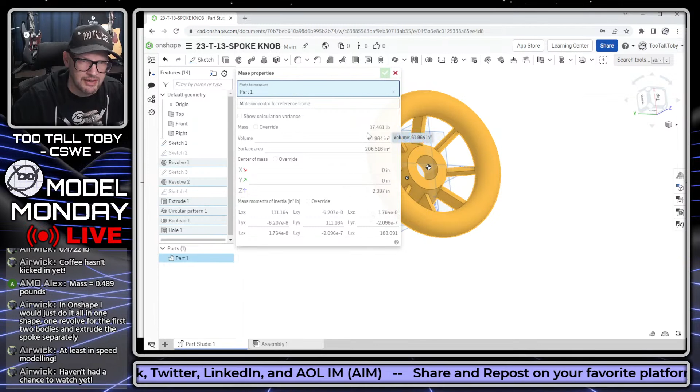And that is how you can model that part. Let's assign the material here. Assign material coming right from the TooTallToby library that's on the public space. And this material is plain carbon steel. We'll click the mass option for this, and the mass is 17.46. And that is correct, 17.46 is the correct mass for this model. So we did it, we got it correct. GG, Toby.

Nice little speed run through that model. Hopefully that gave you guys an opportunity to see what it would look like. Rich Penn is in the chat. What's up, Rich? Thank you very much for the GG.

In the tournament, we would have to take this number, Control C, go over here to the chat, Control V, paste that in there so that we could be judged, so we can make sure that it's valid. But yeah, that's how I would go through and model that part.

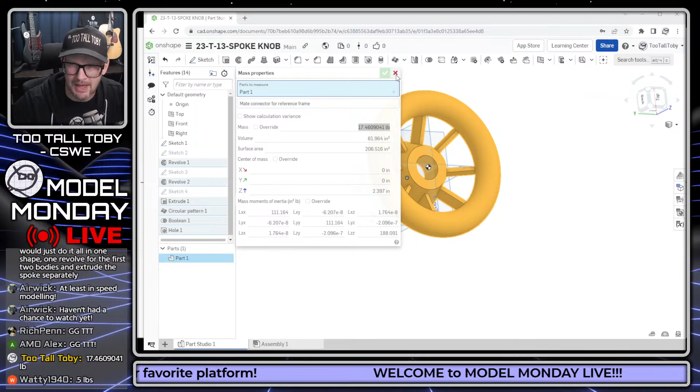And I think the big lessons there from modeling that part, again, are keep your sketches simple. I know it's true, you can absolutely include everything in one sketch. But sometimes, if you want to see an example of where that can go sideways, take a look at the tournament footage from this weekend. Sometimes having everything in one sketch can actually be prohibitive, and you can actually be a little bit better off modeling your features one by one.

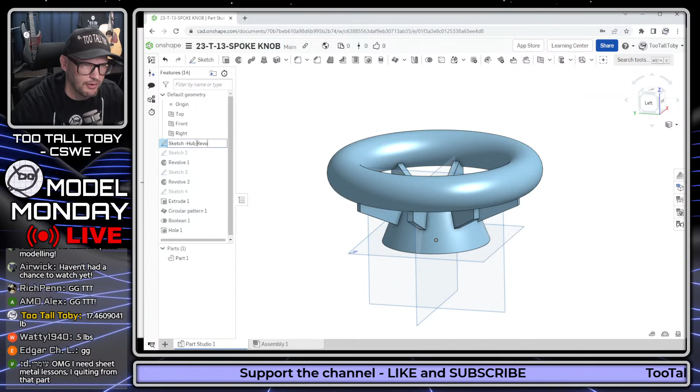It's something that I think is debatable when you're speed modeling, but certainly when you're modeling professionally, and especially when you're modeling on a team, the ability to simply rename these features can make such a difference to your teammates. So if this first sketch here is renamed to something like sketch, and then I'll just call this one hub revolve, and then this feature here is renamed to hub, and then maybe even call it hub revolve.

So I would call this one rim or outer rim revolve. I'm kind of leaving love notes here to my teammates so that they know what to expect when they look at this model. They can just look at the model and see, oh okay, I can see. I don't have to roll anything back. I don't have to look at the history of this model. I can just see right from the tree how Toby did this.

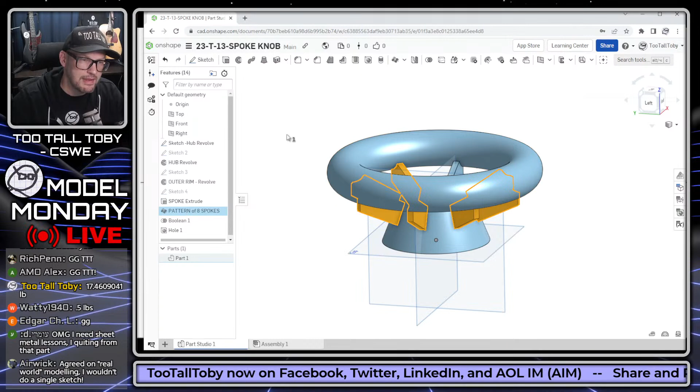This one I'll call pattern of 8 spokes. And that can be really useful when your client comes to you and says, actually I don't want this to be 8 spokes, I want it to be 6 spokes. Well, when you can just immediately identify which feature is driving that geometry, that's going to make for much better design review meetings with your clients. Your client's going to have a lot more confidence in you as a designer, as an engineer.

You're going to be like, no problem, I know exactly where that feature is, as opposed to being like, okay hold on, I have a couple different revolves here, I'm not really sure which one was the hub and which one was the thing and which one was the spoke, hold on let me roll back, let me roll forward. Your client's going to have way more confidence in you if you just say, yeah no problem, you want that to be 6? Sure, let me just change this real quick, make that 6. How's that look to you?

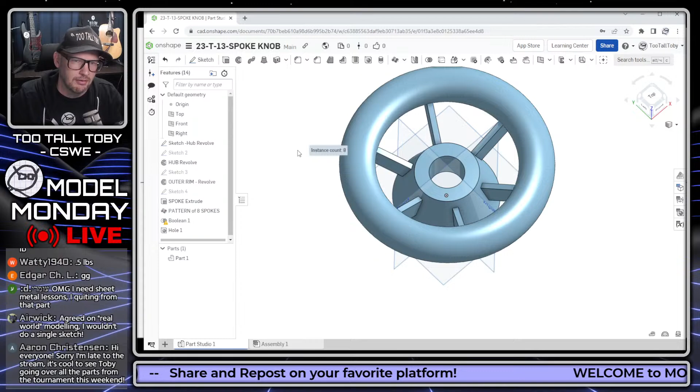And then they're going to look at that and be like, wow, that looks great. And then all you got to do is just go back here and remember to change this back to 6, rename the feature. If you don't want to have, so this gets a little more nuanced. Sometimes people will say, don't include any numeric values here in the tree because they're not going to update dynamically.

Although I'm sure Onshape could probably write a FeatureScript to have us show the numeric value directly in here. So...

That's the idea of working here with a speed modeling challenge, one of the speed modeling challenges from this weekend.

Aaron C is here in the chat. He was the star of the tournament this weekend. What's up, Aaron? Welcome, welcome. Thanks for joining us. All right guys, I hope I gave you enough time. I know that sheet metal challenge is a little difficult.

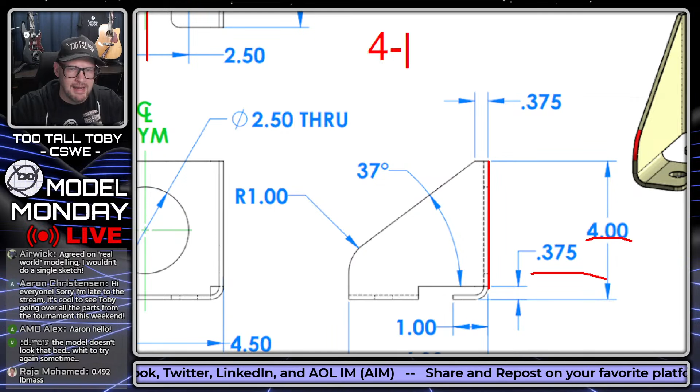Then I'm probably going to extrude that down, but I'll stop short—not the full 4 inches. I'm going to extrude it to 4 minus 0.375. In most CAD tools, certainly in SolidWorks and Onshape, you could type in 4 minus 0.375 and that's going to give you the math—you don't have to do it yourself.

It's 3.625, just in case you guys are wondering, but you can let the software do the math for you. So once I create that shape, that sets me up nicely to do what's called an edge flange. When I do the edge flange, I can modify the profile to create this shape. Then I can do another edge flange, and I don't even need to modify the profile to create this next shape.

Then I would go in and add these radii of 0.25. I would add these holes, and I would finish up by trying to remember to add this hole, which is very easy to forget. I've seen a lot of people forget it.

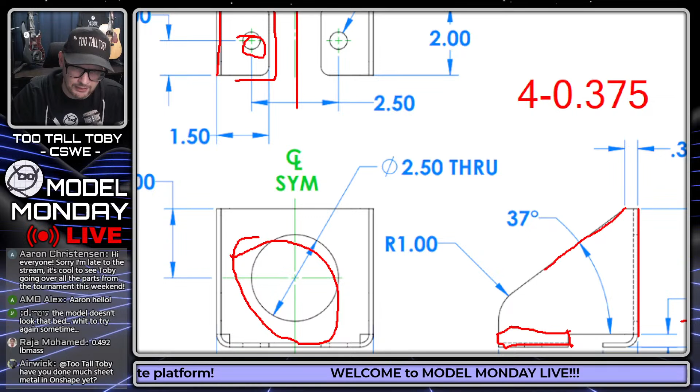Oh, I forgot to mention, sorry. After I do that first feature, then I would do a cut extrude, and the cut extrude would look like this. Probably I would just include that radius in the cut extrude, although certainly you could just do it as a triangle and go back after. But I would do a cut extrude as my second sketch and cut that initial flange off like so.

Brian Jackson is here. What's up? Welcome, thanks for joining us.

All right guys, let's see what the answer is for this one. We're coming up against the top of the hour here. So who got it first? I think it was Airwick. Airwick came in here with 0.5458, and then revised right away to 0.5289. Nice. Oh, and then revised again to 0.4722.

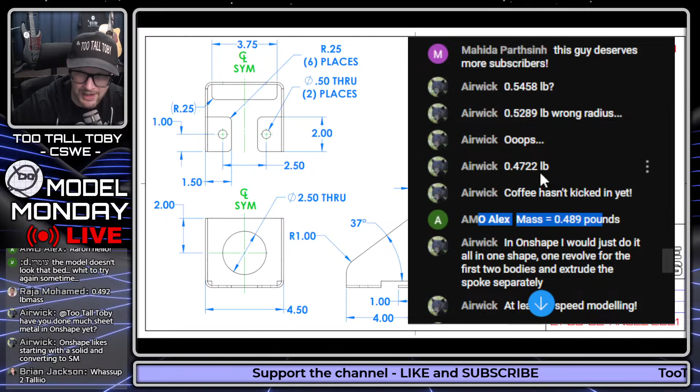AMO Alex coming in with 0.489. Very nice, very nice. Let's see here, we got Watty1940 coming in at 0.5 pounds. You got to increase your precision on your mass properties to get that out to three decimal places. We got Raja Mohamed coming in at 0.492 - another person who's in the tournament a little bit later in the season here.

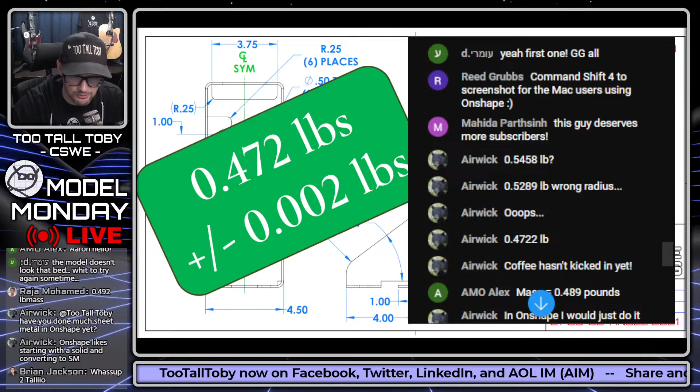All right, I think that's all the answers I'm seeing here. Let's find out what the correct answer is. The correct answer is 0.472 pounds. So who got it first? Looks like it was Airwick on his third try, 0.472 pounds. So let's give a GG, a good game, to Airwick.

Congratulations, Airwick, very nicely done. And GG really to everybody, GG to everybody who participated in the challenges today. These were not easy challenges. They took me a while when I was going through and auditing them, so I know these are not easy. GG to everybody who gave them a try. And if you haven't given them a try yet, or if you're watching the recording, good luck - these are definitely some challenging ones.

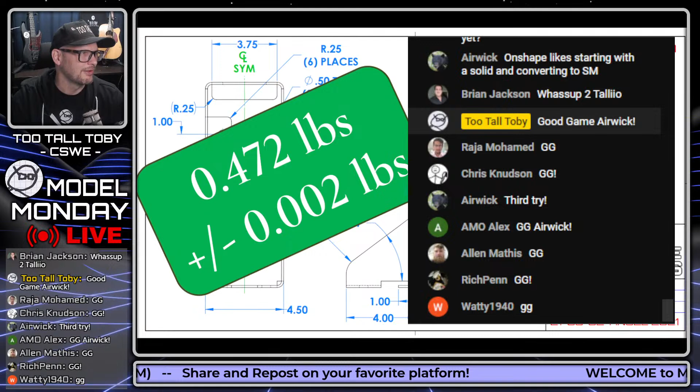I'm reviving some older challenges that we did. I'm going to load these into the practice models playlist as well. But these are definitely not easy. I guess in the old days I really gave you guys some tough ones. But Model Monday Live is going to be a little tougher than the tournament in the round of 32 anyway, so this is good practice for all the tournament runners out there.